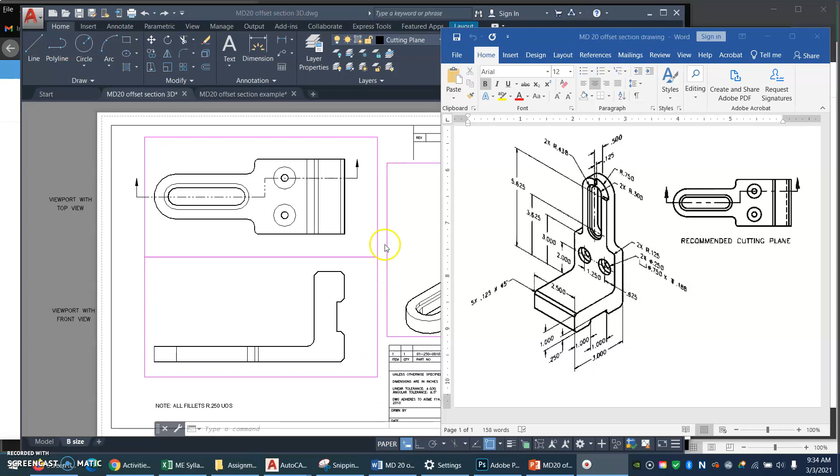I'm going to try and be tricky and show what he recommends as a viewing direction, and we'll see how it goes. So let's go to a blank model space here. Now if I'm going to make this vertical leg on the right and this horizontal leg sticking out to the left, like he's showing for some inexplicable reason, what I want to think about first is what is just the most basic beginning geometry of this shape. Well, it's an L, isn't it? And this L is 1 inch thick and it's 3 inches wide from the front to the back, or the top to the bottom.

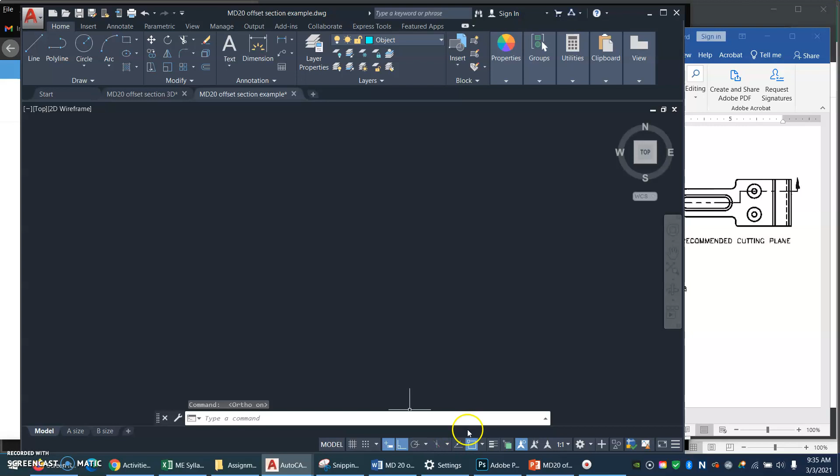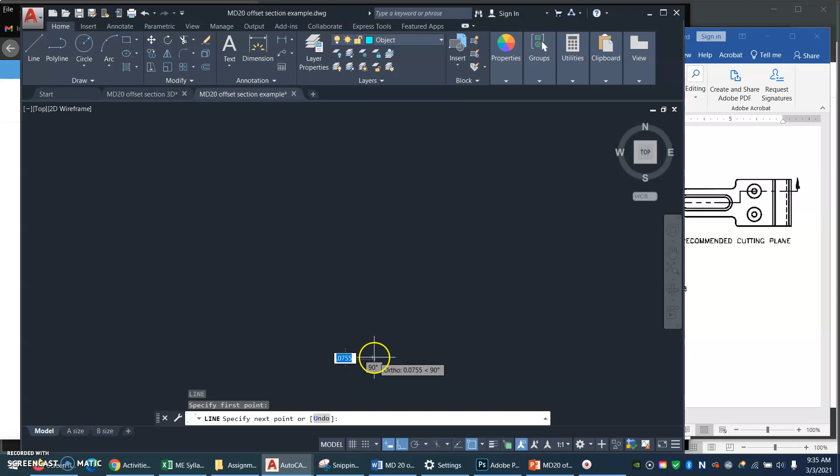So here's what I'm going to do. I'm going to come over here and get a line, and I'm going to be smart and make sure ortho is on, ortho button or F8. Okay. And now I'm going to just draw this leg. I'm going to go up 3 inches and over 1 inch. So I'll get a line, L for line. I'll just draw. And because ortho is on, this will be a little easier. I'll go up, I'll enter a 3, enter. Then I'll come over 1, enter, and down 3, enter. And enter again to end the line command.

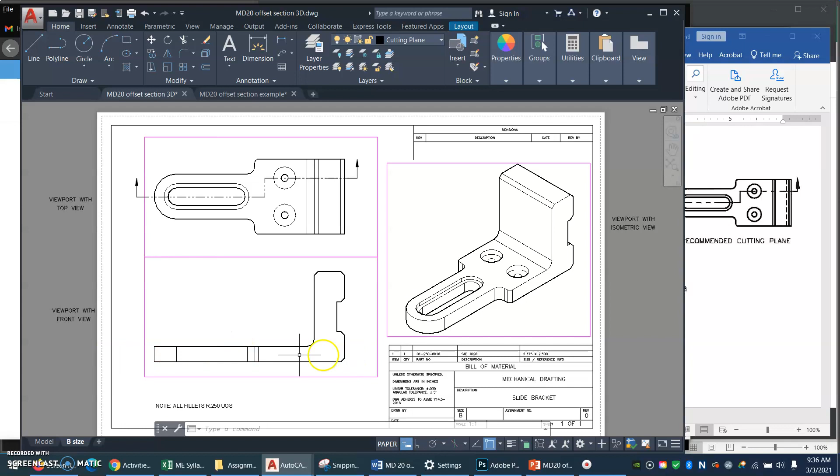So there's my vertical leg. That is this thing here. Or looking at our 3D model, I just started this thing here. Now I'm going to start this horizontal leg here. And that horizontal leg is, how thick is that thing? Looks like it's 1/2 inch thick. And it's 5 5/8 long from the back corner out to the center line of this slot. It's not to the end of the part, but just to the center line of the slot.

So, you know what? I think I'm going to use offset to locate where my center line is going to land. So I'm going to offset, O for offset. What is the offset distance? 5 5/8, 5.625, enter. And I'll select this line and offset out this way.

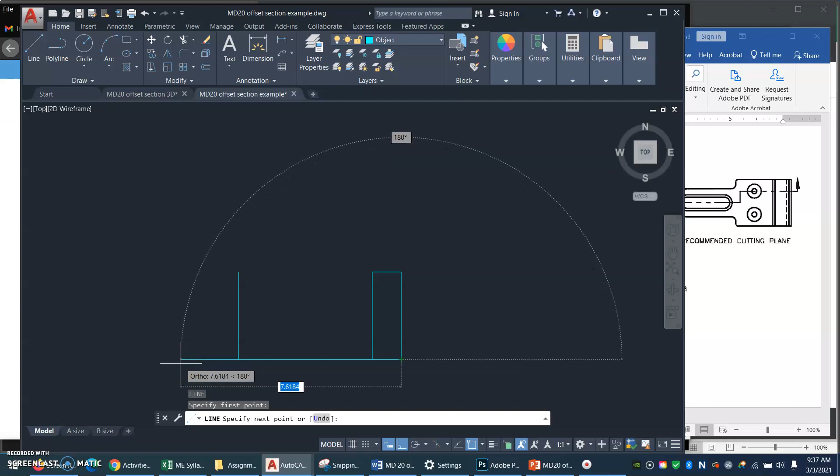Okay. Now I'm going to draw this horizontal leg, and I'm going to make it 1/2 inch thick. And I don't yet know how far it is out to the end of the round nose. I know I could figure it out, but let's say I don't know. So I'm just going to draw a horizontal line, and I'll just go out here a ways. I'll trim it later. And now I will use O for offset, and my offset distance will be 1/2 or 0.5. Enter. And now I'll click that line, click that line. Okay, there is the beginning of my L shape.

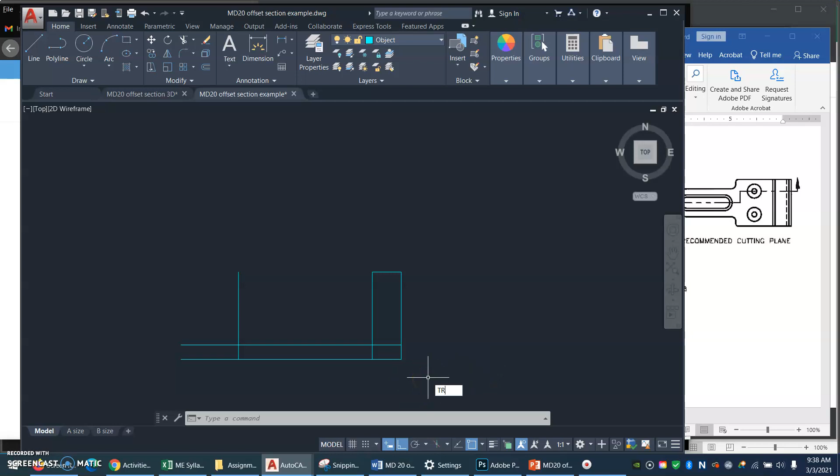And I think to keep things simple for my little pea brain, I will do a trim. I'll just hit enter to select all as the cutting edges. And I will just trim out those two lines so that I can begin to see where my object is. Now, I'd like to find out how wide is this thing, because I want to start the top view. It's 2.5 inches wide. All right.

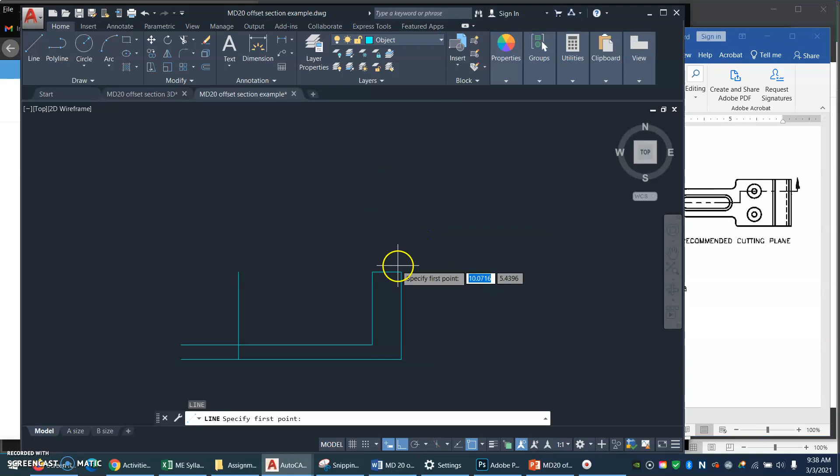So up here, if I can, I will pick up with my green ghost line, with my object snap tracking. I'll start my line there. And I'll go over here a ways, I don't know how far, enter. And now because my part is 2.5 inches wide, I'm going to do O for offset and specify a distance of 2.5, enter.

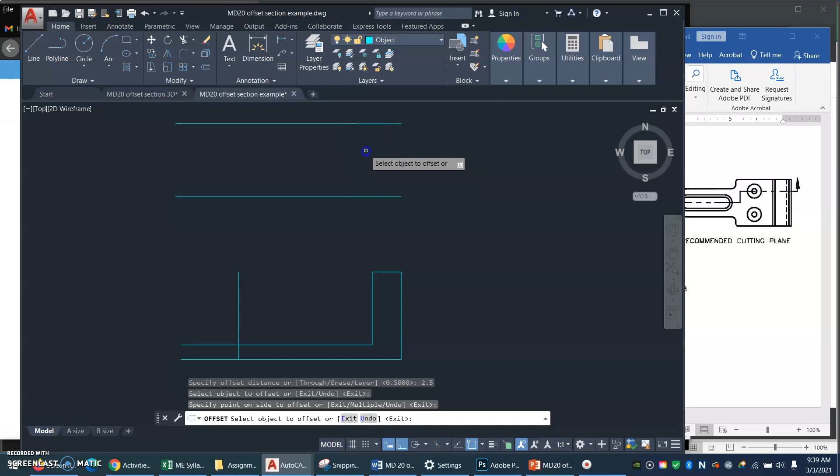Offset. And I can now... I could use my object snap tracking. I sometimes get insecure and don't. Let's see if that will work. Oh, yay. That's great. If it didn't work, I would just draw a line starting here, going up here, and

then I would trim. Now, this temporary line here that I drew, remember that is the center line of this upper radius. So I think I will get that going up here in my top view, so I know where my radius is going to be.

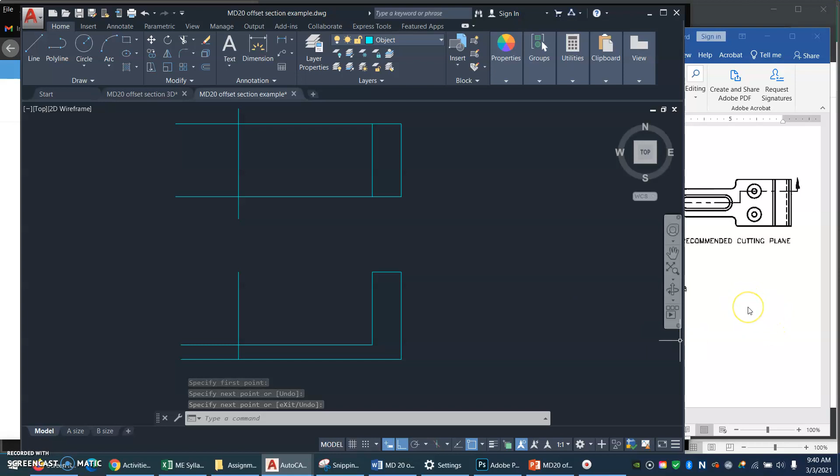Now, if this thing is 2.5 inches wide, well, it doesn't matter how wide it is. I'm going to draw a center line. Oops, sorry. That was a mistake. I'm going to draw a center line right up the middle of my part. Come out here a ways. There's where the center of my radius thing will be.

And now I think I will put this radius nose out here. And that has a radius of 3/4. I find the easiest way to do that is just to make a circle and trim it. So C for circle, specify the center point. I don't trust those O snaps.

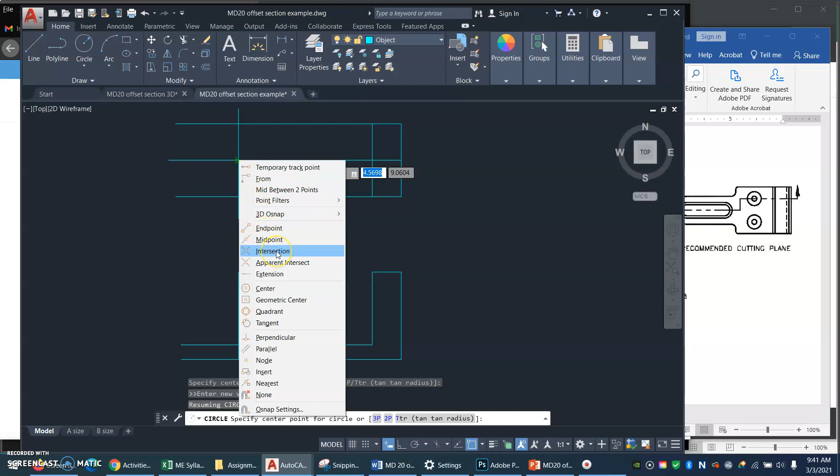What I really want is an intersection, so I'm going to go Shift right mouse to bring up this temporary menu, intersection. So I make darn sure I get my circle right there. And the circle, this says specify radius, so good. What I know is the radius, so I will type 0.75. There's the radius. Woohoo!

Now, let's see how far this skinny part goes. It's 3 inches from the back edge out to the end of the straight stuff and the start of the slotty stuff. So 3 inches. I'm going to offset from my back wall here 3 inches outward. O for offset. Offset distance is 3. Enter. And I will offset that line.

Okay. Why do I do that? Because now I can draw a line from the quadrant point of that circle I made and end it right there. Oh yay. Right there. And now I'm going to do some trimming. I'll just go TR, enter, to make all the lines the cutters. I know that's going to take an extra click or two, but it's okay. So trim, trim,

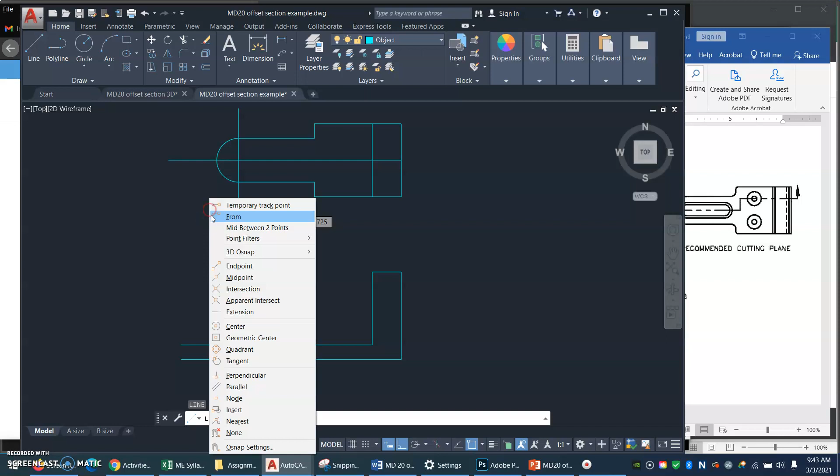trim, trim. And I'm going to trim out this stuff out of the middle. And let's see if I can trim my circle. Oh yes. See, that's starting to look like something. Now I can... I would like a quadrant. Shift right mouse, quadrant. Oh, I clicked the wrong one, didn't I? Shift right mouse, quadrant, that one.

From there down to here, there's where my nose will end. TR for trim, enter. I'll trim that. Now I can trim those. Ha! Now we're getting somewhere.

All right. Now let's look at this slot inside here. Notice how I'm working from general to specific. So I started with the L shape. Now I'm starting to put in the bigger round things. I'm not yet worried about chamfers and fillet radii and holes and all of that. I'm just trying to get the outline of the thing.

So inside here, in this slot is, oh my. We have one slot that is a radius of 0.3 and one slot that is a radius, the counterbore, that is a radius of 0.438 or 7/16. So all right, let's do the little one.

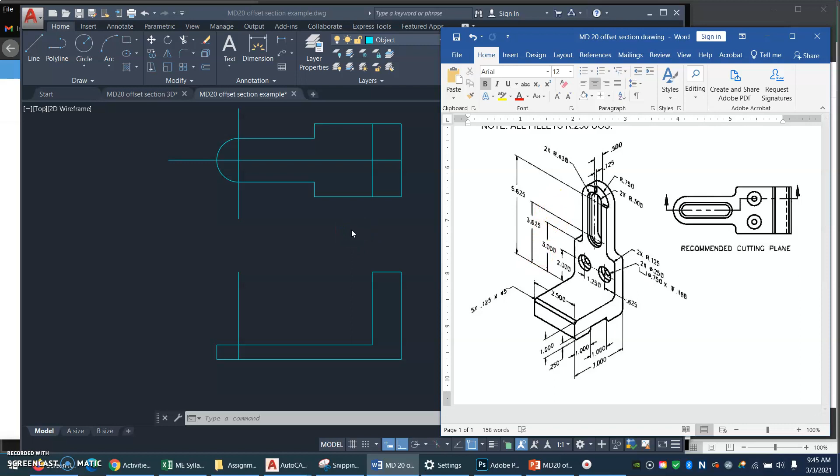See, oh, you know what? I should figure out where the slot ends. So we've got 3 5/8 from the back edge to the next slot center line. Let me do that. Offset 3 5/8 from back here to where the slot ends. Okay, now I'm going to go C for circle, click, and my radius is 0.3.

Enter to bring the command back. Ooh, not an intersection. Shift right mouse, intersection. And it's already remembering that the radius is 0.3. See that in the command line? So I can just hit enter. Yay! Now let me make the bigger radii for the counterbore thing.

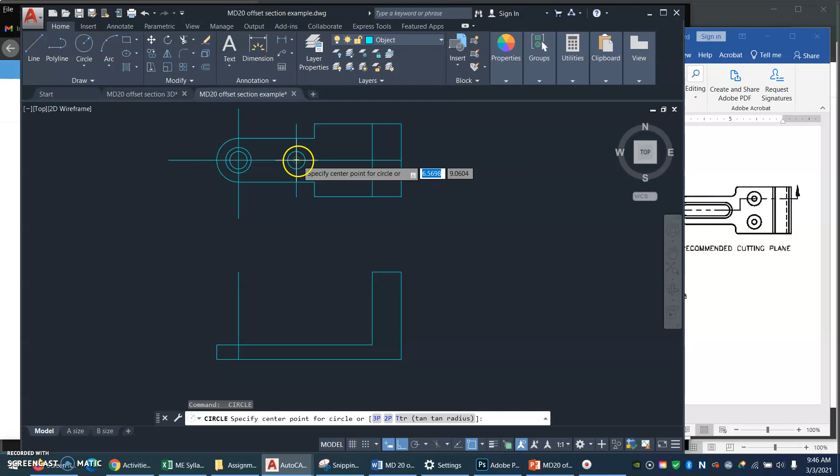So center of the circle is a good O snap. Radius now will be 7/16 or 0.438. Enter to bring up the command again. There's my center O snap, good deal. Same radius again. Ah, look at that.

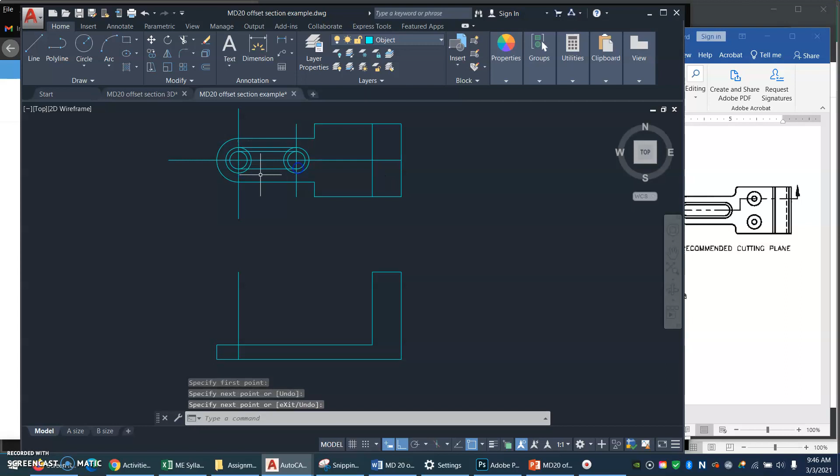So now I will get a line and I will go from the quadrant point to the quadrant point. Quadrant point to the quadrant point. I'll do that 4 times so I get my slot in here. And now I'm going to trim those circle things. I think I will use these center lines as my trim stuff to make it faster. Oh, looky there. So now we've got some slot going on.